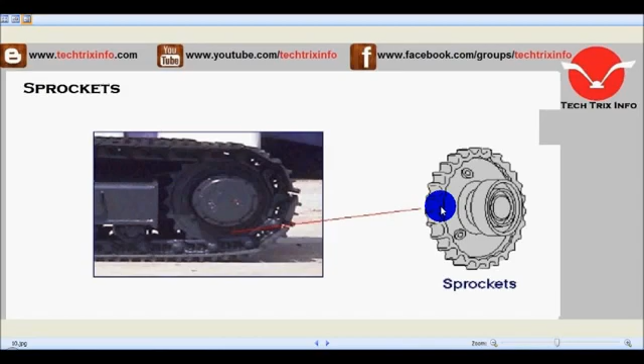Let's identify the main components. On the rear part we have the drive, where the sprocket is situated. This gear is called the sprocket, and it's located at the rear part of the track.

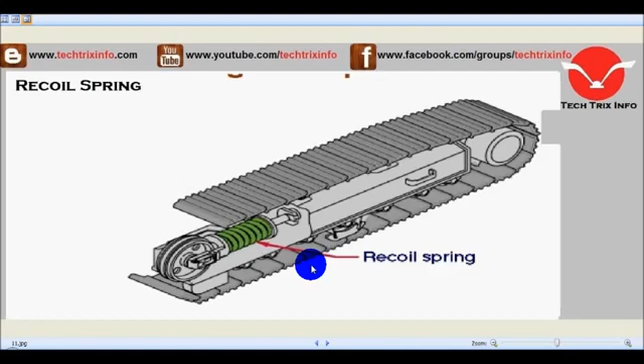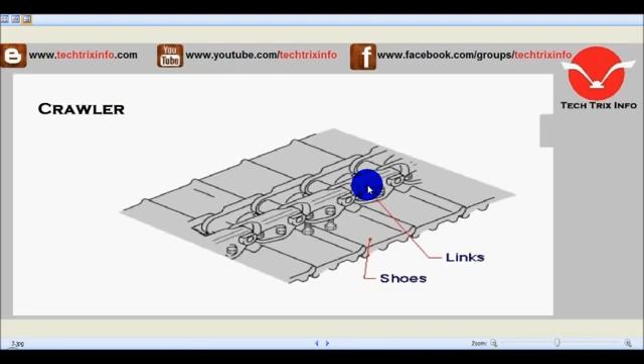That's a crawler. Then we can see the grousers and the plate. These individual plates are connected together to form the track. Here we can see three plates connected, and the projecting part from the plate is called the grouser. The grouser helps in providing grip when the excavator rolls on the ground.

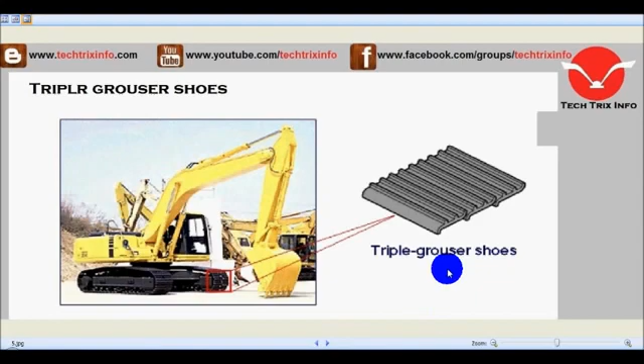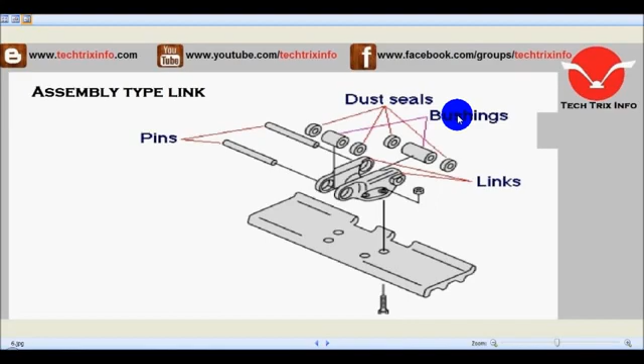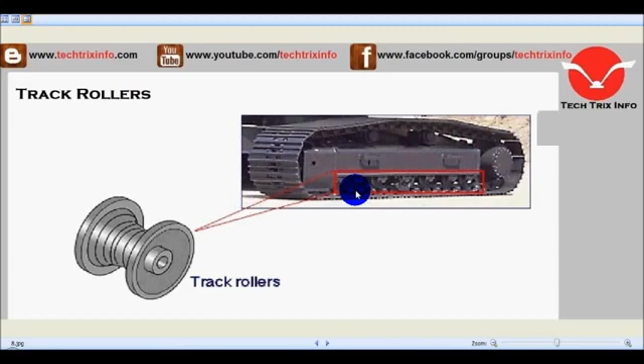Next let's see the rollers. On the bottom portion, this track is mobiled with the help of these track rollers. The pins and links have been connected towards these rollers. On the bottom portion we can count about nine rollers. At the top we have two rollers which roll on the links, which work as a rail, helping to mobile the track of the excavator machine.

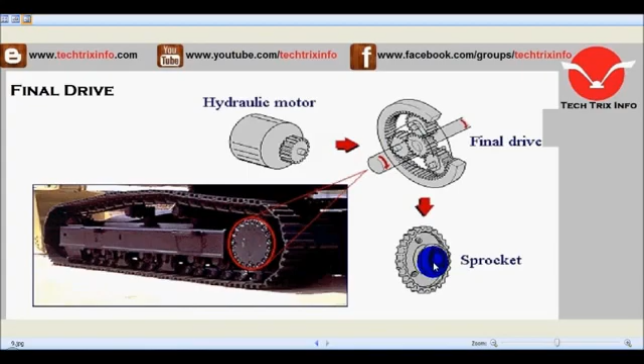Then finally we can see the final drive, provided with a hydraulic motor and a gearbox towards the sprocket. We have a hydraulic motor, and through this gear system, the gearbox, that drive reaches the sprocket at the rear side of the track. So here we have the gearbox and the hydraulic motor, which provide the drive towards the sprocket, which reaches the track of the excavator machine.

So I believe you got the working of the track of an excavator machine and its components.